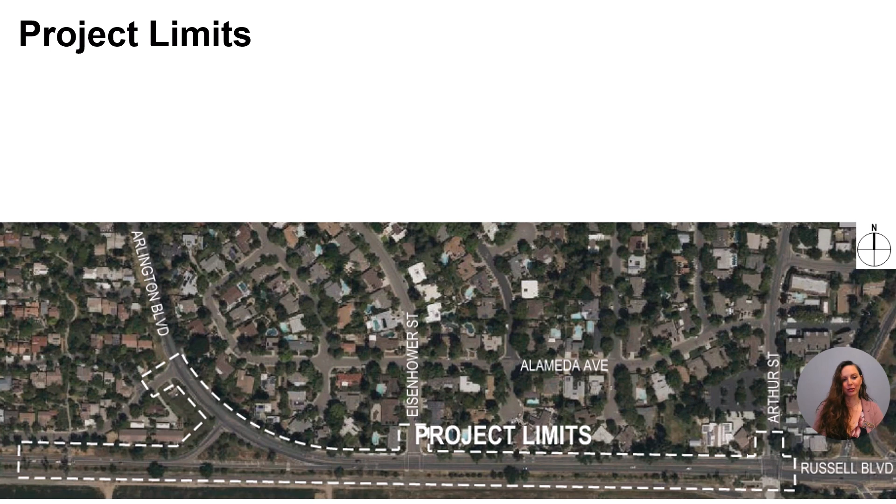The white dashed line you see on the screen here is our project limits. So that is where the improvements are happening, and then outside of those limits, it'll be transitioning back to the existing conditions. So the project emphasizes bicycle and pedestrian safety and circulation while still accommodating vehicles.

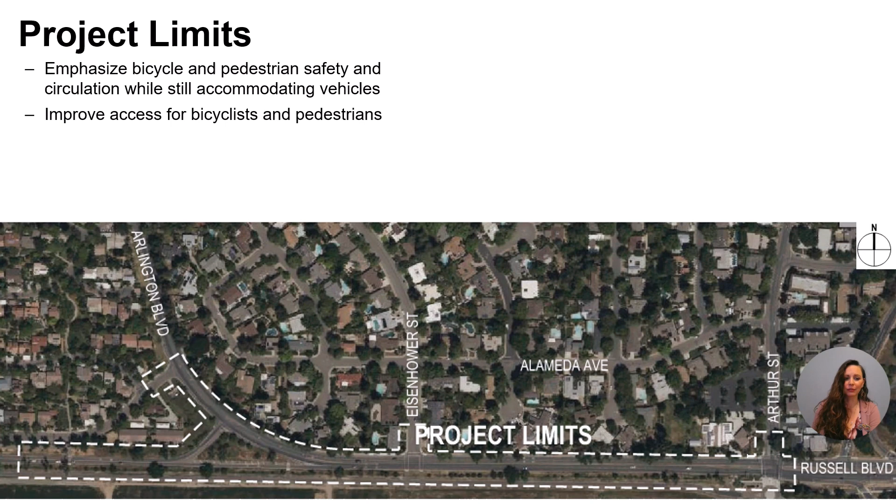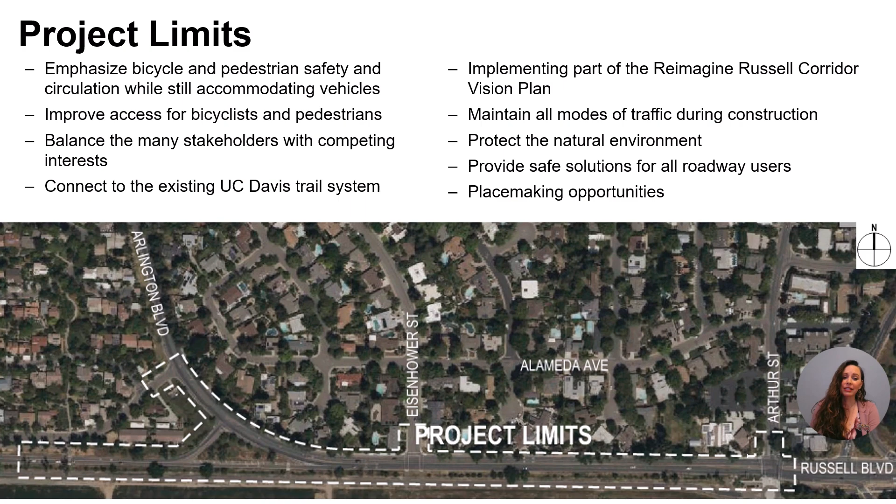It's designed to improve access for bicyclists and pedestrians, balance the many stakeholders with competing interests, connect to the existing UC Davis trail system, and it's implementing part of the Reimagine Russell Corridor Vision Plan, as well as aiming to maintain all modes of traffic during construction, protecting the natural environment to the maximum extent practical, and providing safe solutions for all roadway users. And there's also opportunities for placemaking, which I'll talk a little bit more about later.

There are various components to this project. Number one, we will be implementing a road diet along Russell and Arlington Boulevard. We will be including bike and ped-focused intersection improvements at Eisenhower. We will be converting the three crossings that you see at Russell and Arlington into the one intersection, as well as removing this mid-block crossing, including it as part of the intersection, and then adding improvements to the mid-block crossing just past the Russell-Arlington intersection.

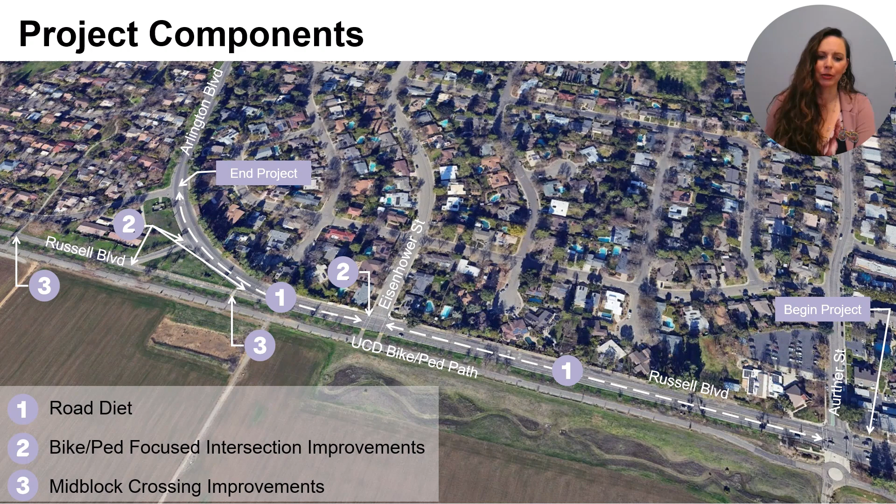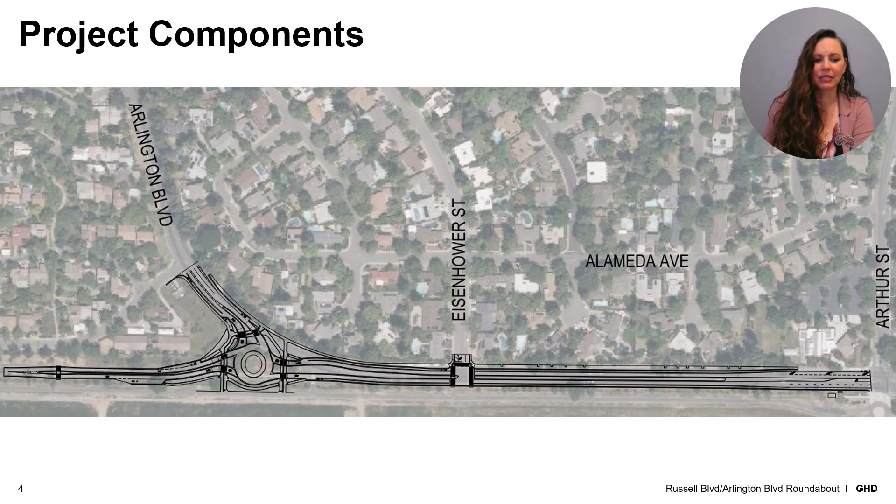Those project components I just explained are shown here on the screen. You can see the road diet, the intersection improvements, the roundabout at Russell and Arlington, and then the mid-block crossings. And I'll go through each one of those in a bit more detail on the following slides. First, we'll dive into the Russell Boulevard road diet and look at how we're proposing to repurpose the roadway.

As I'm sure most of you are aware, the existing Russell Boulevard has 2 lanes in each direction with no bicycle facilities, and the sidewalk isn't accessible. It has trees growing right in the middle of the pedestrian pathway. In the proposed, we are proposing a bicycle lane with 2-foot striped buffers on either side, 11-foot travel lanes, a raised median with landscaping and or hardscaping, and then wider sidewalks that allow a clear pathway while protecting the existing trees in place.

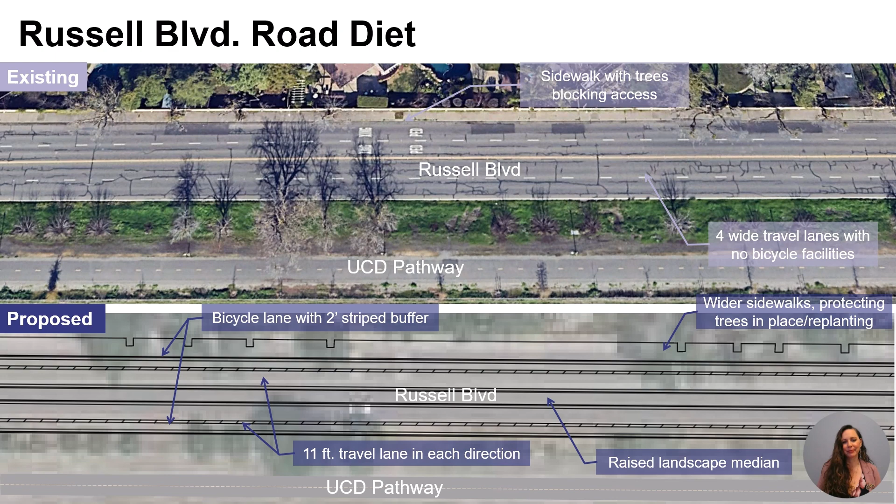Now let's take a detailed look at the Russell-Arlington Boulevard intersection. Before we started recommending solutions, we wanted to ensure that we understood the existing conditions. And 3 of us on this team are local residents and experience those challenges on a daily basis. So with our input from the city and input from stakeholders, we know that this intersection has no consistent bicycle connectivity. It has minimal pedestrian connectivity, and a lot of that connectivity is through mid-block crosswalks or uncontrolled crosswalks. It's a vehicle-centric roadway configuration. The Y and T intersections are confusing. There's higher speeds than desired, and there are documented collisions.

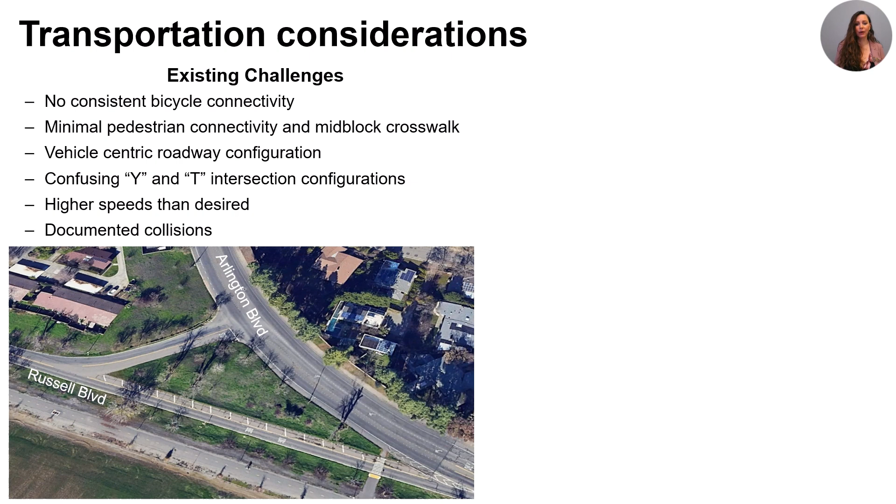So as we began our analysis, we looked at level of service. So in Davis, at this intersection, cars aren't the only users. So all of our analysis looked at experiences and safety of pedestrians and bike users in addition to cars. But level of service, or LOS, is a qualitative measure used in traffic engineering to assess the quality of traffic flow on roadways and intersections, and not just vehicle traffic flow, all traffic flow. It categorizes traffic conditions into different levels, typically ranging from A to F, which A represents free flow traffic and F indicates severe congestion.

So as we began looking at alternatives, we looked at a signalized option and a couple roundabout options. And in this table, the dash indicates no improvements, the O is minimal improvements, and the plus is improvements. And as you can see, the roundabout outperformed the signal on many of these factors.

So based on the analysis performed, it is recommended that the roundabout alternative be moved forward as it not only performs better operationally, but provides better alignment of this challenging Y intersection. It also better accommodates non-motorized users and improves safety, sight distance, and traffic calming compared to the signalized intersection. The construction of a roundabout would also reduce delay at the intersection and remain operational well past 25 years in the future. Additionally, the roundabout would prevent queue buildup on Russell Boulevard and will not create significant queues on Arlington.

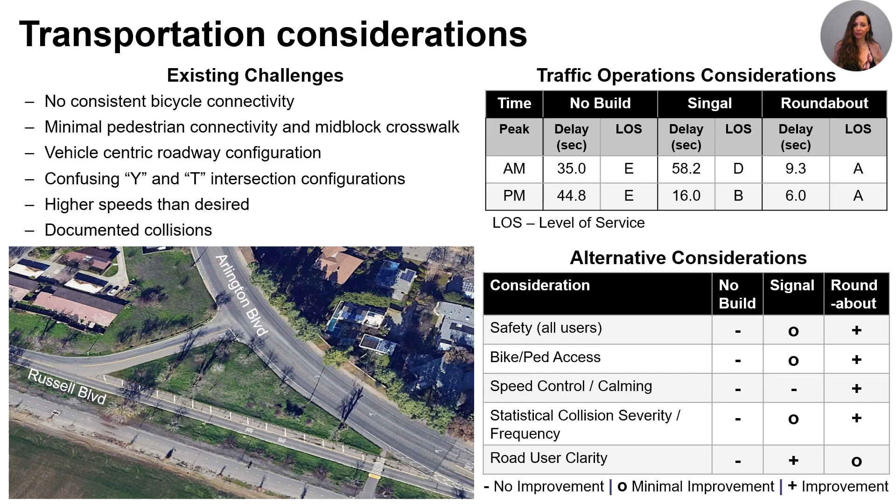Last year, we presented this preliminary concept to the former BTSSC, which is now the Transportation Commission, and we received input and feedback on the layout. We recommended the geometry that you see here on the screen because it is consistent with the current eastbound Russell alignment. It provides speed reduction of Arlington, shorter pedestrian and cycle path travel, and more linear crossings. It has a smaller inscribed circle diameter, promoting slower circulating speeds, and allows for maintaining traffic during construction.

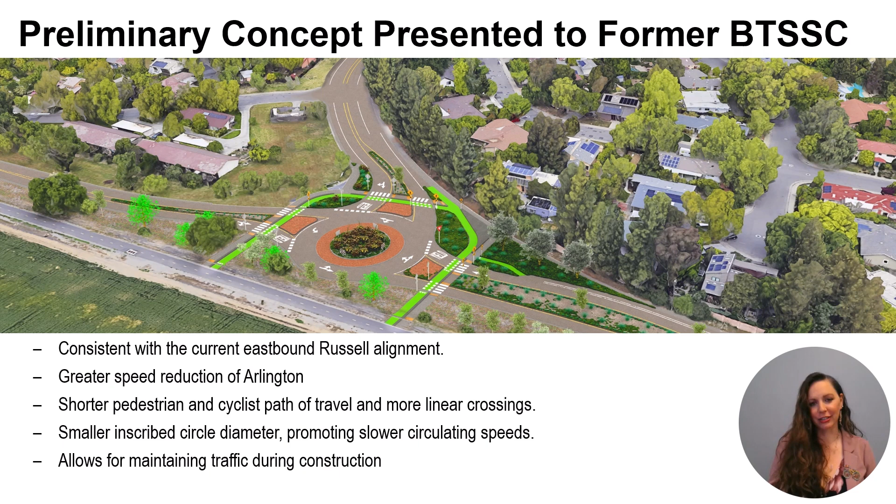Before I get to the revised concept of what the intersection looks like based on the comments from the Transportation Commission, I wanted to take a few moments to look at roundabouts with separated bikeways. So we selected a roundabout with separated bikeways because, as I said earlier, in Davis and at this intersection, cars aren't the only roadway users. So we focused on a solution that would be pedestrian and cyclist friendly, and that includes separated bikeways at the roundabouts. The separated bikeways allow for the cyclist traffic to have their own dedicated space and pedestrians to have their own dedicated space.

So the separated pathways allow a cyclist to navigate through the intersection with minimal vehicle-bicycle conflicts and minimal bicycle-pedestrian conflicts. It is important to note that the bicyclists do have to travel in a counterclockwise direction around the roundabout to complete their turning movements. And this also improves safety because the drivers only need to look at the cyclists coming from one direction rather than bidirectional traffic.

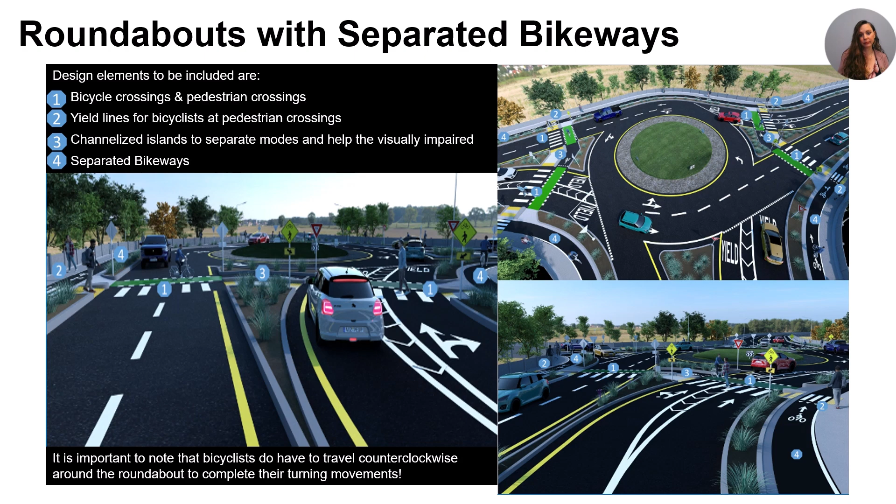Based on the comments received from the Transportation Commission, we provided various changes to that preliminary concept that I showed earlier. And one of those key changes is shown here in red on the screen, and that indicates the raised intersection. If you think of a speed table where you've got that gentle slope or a raised crosswalk, that gentle slope that leads up to the crossing and then it goes back down, that's essentially what we're doing here at this intersection to slow vehicles down even more.

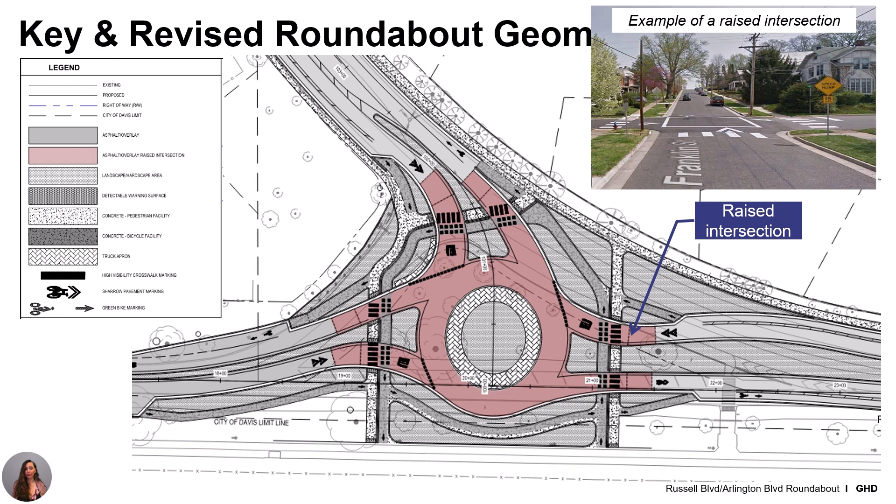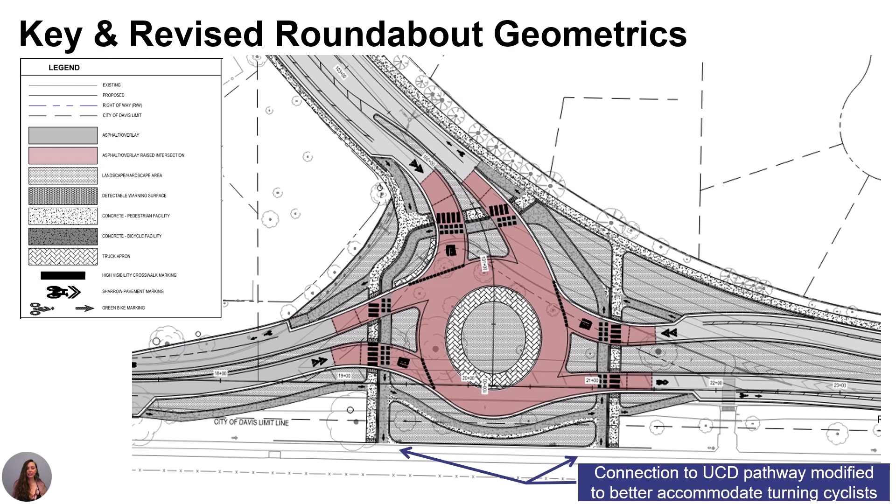So the roundabout is designed to have speeds no higher than 25 miles an hour. On average, on our roundabouts, we see entering vehicles around 18 miles per hour. So this raised crosswalk feature will slow cars down even further ahead of the pedestrian and cyclist crossings. We provided more direct bicycle connections, including connecting to the UC Davis pathway, and incorporated some sweeping curvature there to make the access onto and off of that facility easier.

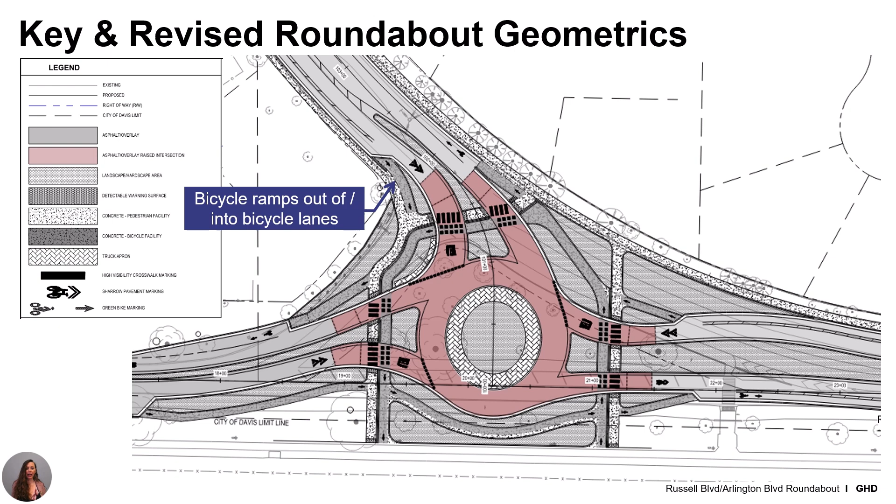We added a through bicycle corridor, so folks on their bikes that want to go just straight through the intersection don't have to get on to the shared use path there at UC Davis. We provided widened sidewalks, which allow us to protect the existing trees in place. We do have a truck apron to keep cars slow while still accommodating large vehicles. We have bicycle ramps out of and onto the bicycle lanes.

There's landscape and streetscape opportunities, and deflection in the roadway to slow vehicles gradually on all three legs. Then, as I mentioned before, the key with the separated bikeways is to separate bicycle and pedestrian crossing facilities. We also reduced the lanes to be 11 feet wide and ultimately wound up with the configuration that you see here on the screen.

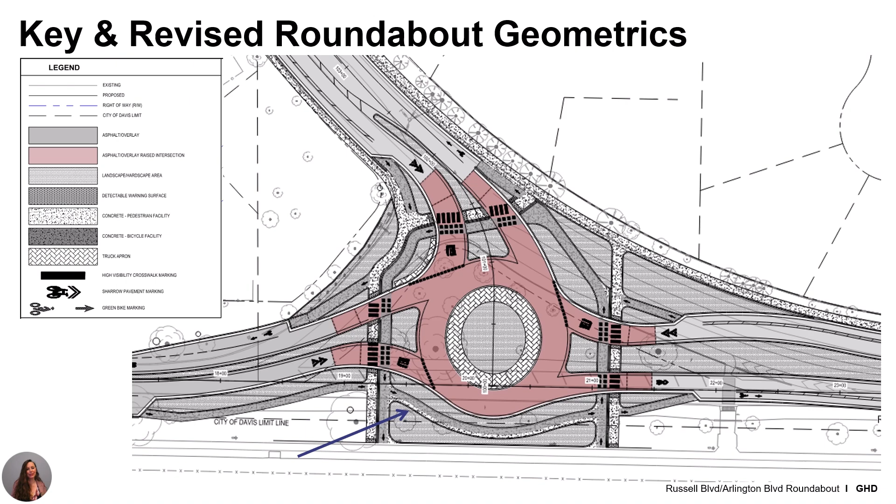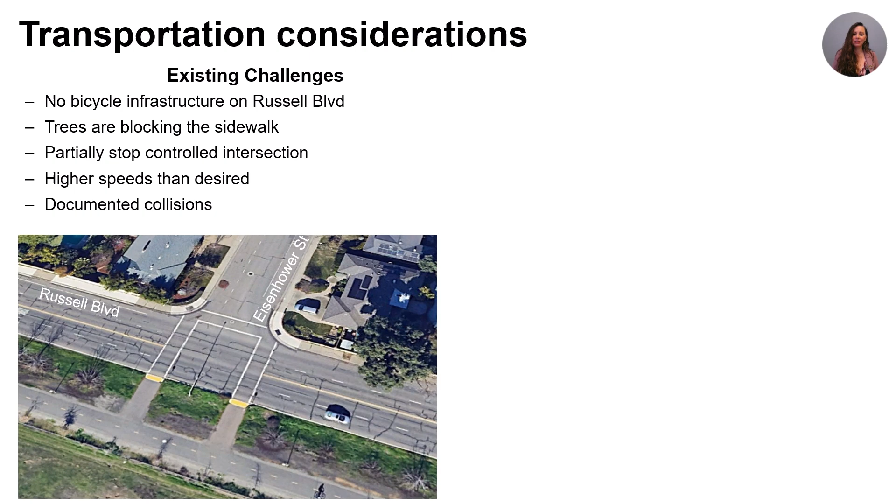Now let's take a look at the Russell Boulevard Eisenhower Street intersection. As the intersection currently is today, there is no bicycle infrastructure on Russell Boulevard. Trees are blocking the sidewalk. It's a partially stop controlled intersection, so vehicles on Russell don't have to slow down. There are higher speeds than desired, and there are documented collisions.

With the proposed design, we will be installing rectangular rapid flashing beacons at each one of the crossings, similar to what is shown here on the screen. We've created bulb outs, so widening that sidewalk creates a shorter crossing distance. There is a pedestrian refuge island here on Russell. Eisenhower will now be a right out only, but left ins are accommodated. And with the roundabout, making that U-turn, if you did want to go left onto Russell, is pretty easy.

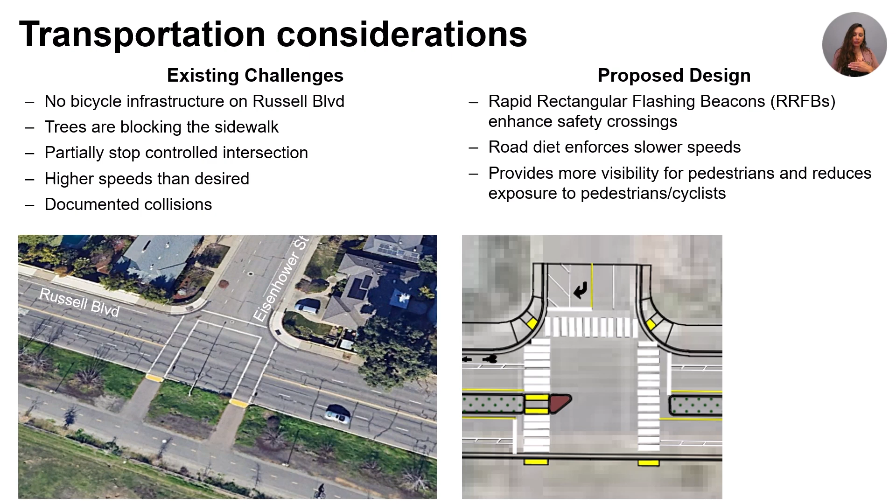Let's take a look at the Russell Boulevard mid-block crosswalk. The mid-block crossing west of Arlington is in a challenging location. It's in that transition zone from where you're going to a more rural environment and coming into the city. And there's also some sight distance restriction. There are trees right next to where that crossing is, and it can be a little harder for cyclists and pedestrians to be detected by drivers.

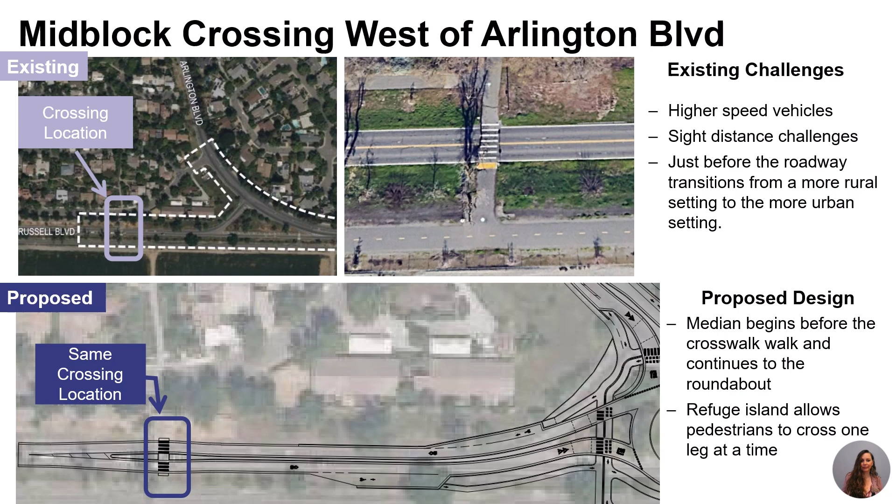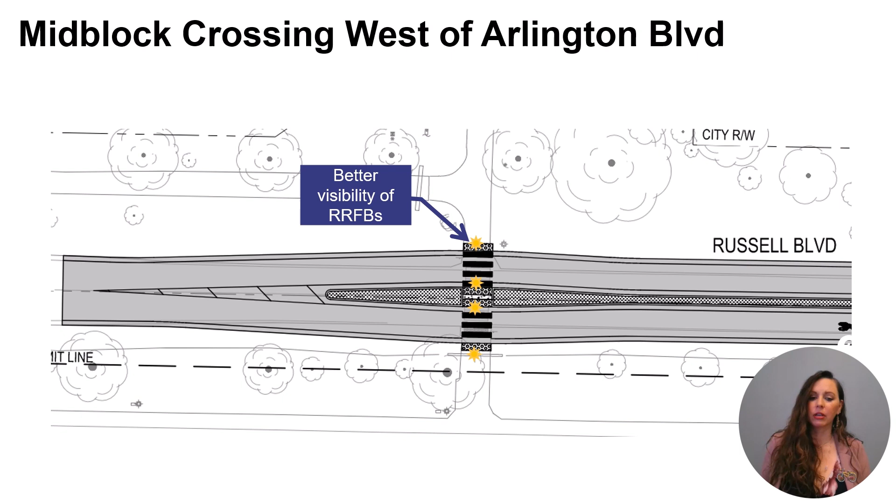So we are proposing to keep the crossing in the same location, but adding in a median, creating some deflection in the roadway, narrowing the road lanes in order to encourage safe and slower driving. Taking a closer look at the proposed improvements, there is yellow striping leading up to the raised median. There will be better visibility of the flashing beacons. There will be flashing beacons on both crossings.

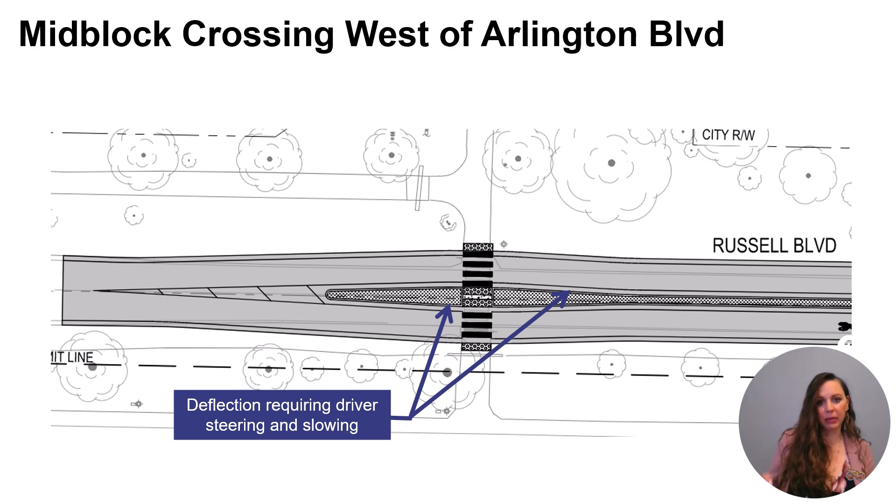That pedestrian refuge allows for pedestrians and cyclists to traverse just one lane of traffic at each time, helping with driver visibility and safer crossings. There is deflection built in with those medians to require the driver to make a steering motion and slow their vehicle down.